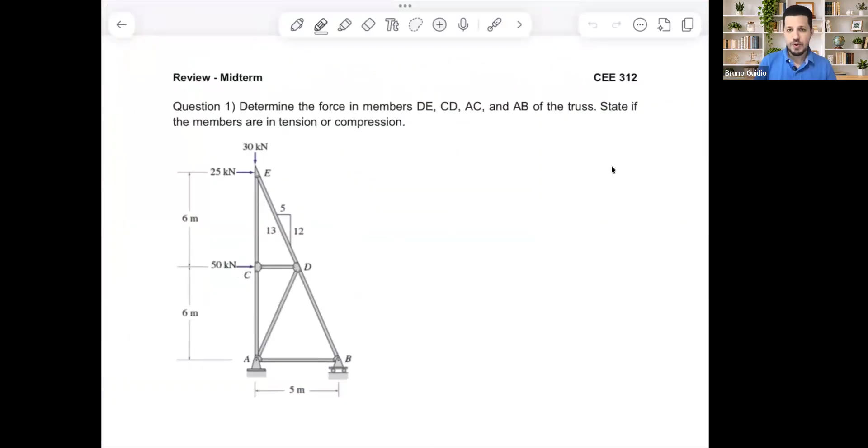Second, today is going to be the review. Let me open the review here. Okay, the review for the midterm exam, that's going to be on Wednesday.

I already told you guys about the midterm, but quickly once again, midterm Wednesday. You can take it anytime, but expect everybody to take it on Wednesday. It's going to be around 4 hours of exam. You're going to have 4 hours, but it's not that you have to use all 4 hours or that all the problems will take 4 hours to solve. Some of the problems are going to be very straightforward, but I'm going to give you 4 hours to work on it.

So today we're going to see some review here. I think I have 1, 2, 3, 4, 5 questions here in the review, but pretty much what I'm going to cover is truss, shear moment diagram, and deflection. So 3 topics. How many questions? Probably 3 questions, or 3 or 4. Let's see how it plays out, but more than 4, I'm not doing that.

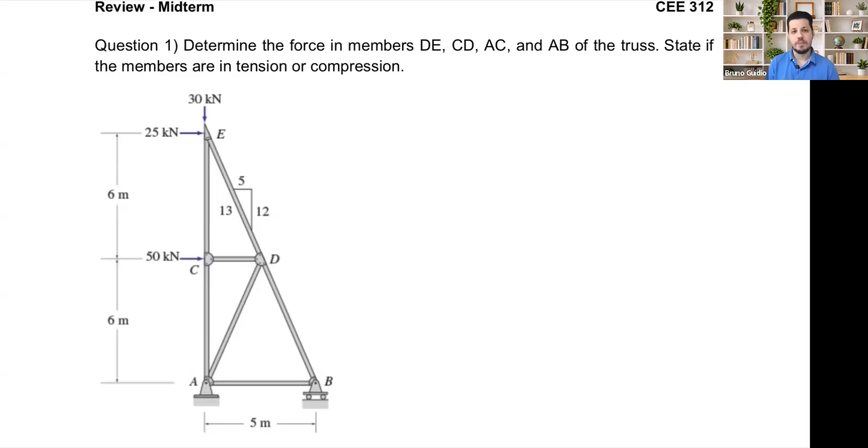For the first problem to review with you, it's the truss problem, pretty much a common truss problem that we have. For the exam, I'm going to give you the choice to choose the method you want. I'm not going to ask specifically for the method of joints or the method of sections. What I want from you is to solve the problem; which method you pick is up to you. I'll solve this problem using the method of sections, and then at the last one, I'm going to solve using the method of joints.

The last joint, the last member. So I can cover both, and also the section is a little bit tricky, or sometimes people like it but get confused about the moment. I'll cover that in the review. But again, I'm not saying you have to solve using sections only. No, you can solve by joints, by sections, or combined, depending how you like.

So the first question: we need to find the force in the members. Let me take my pen. DE, this is the member, CD, and AC, and also AB. So I need to find the force on those members - 4 members in this case - and state if they are in compression or tension. I have 30 kilonewtons on the top, 25, 50 kilonewtons over there, and this triangle here is going to help me find the angle probably. And I think that's it.

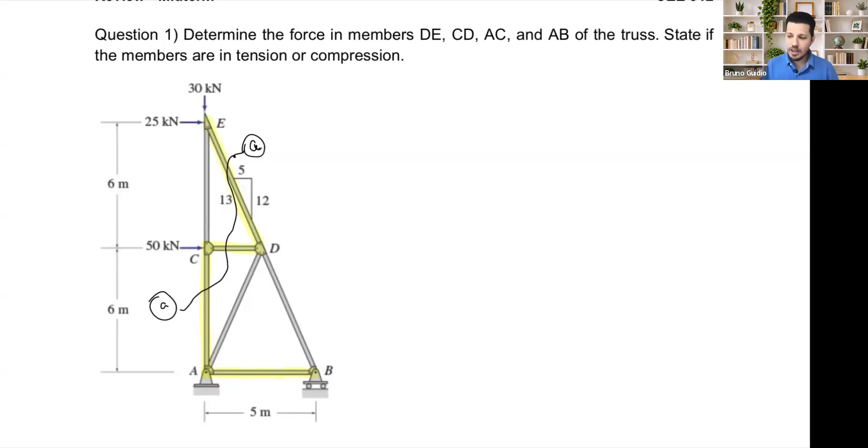All good? What's the first step that we need to do in order to start this problem? Well, the first step always is the reactions. But I don't know if I mentioned this here in this class or not, or last year.

Okay, once we make this cut, take a look, we're going to make this cut. We need to select this side or that side. For example, if I make this cut and select this side here, does the top side have any reaction, any support? No, no. I just have this part, this part here.

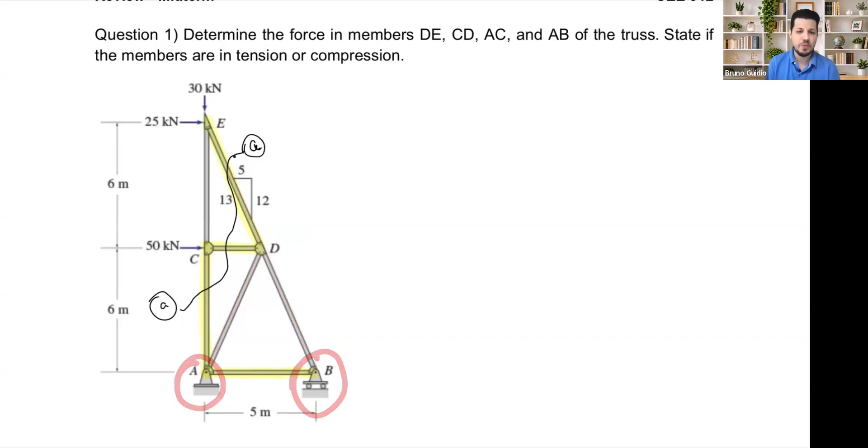Okay, this one right here. I have 50, 25, and 30, and that's it. Now, if I select the bottom part, meaning this section here, what I have is reaction A, reaction B, support A, support B. The section sometimes is good because of that.

For example, for this problem here, we can select the top and skip the calculation of reactions. We can skip it because once you select the top, we don't need the reactions. And that's what I'm going to do. I'm going to select this one here, so I'm going to have E here and up to here at C, okay.

And I made a cut, however, this cut right here, let me just extend it so I can use those points if needed. If needed, I can use those points right here. All right, I think it was too much. Should I delete this? It's narrow here. Looks better. All right.

Once I do that, this is my FDE. This is my FCD. And this is my FAC.

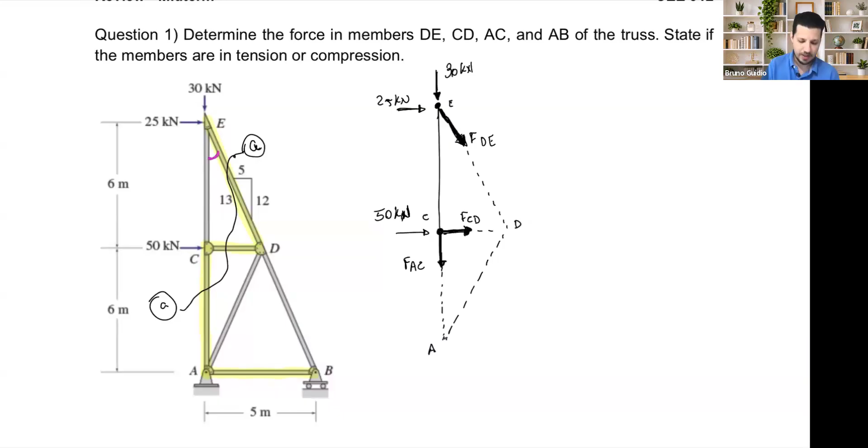All right, so that's what it is after the cut. Let's just figure it out really quickly here. This angle, let's say angle theta. What is going to be this angle theta?

Well, by similar triangles that we have here, this angle, do you agree that's the same as this angle here? As I agree, so this is the triangle, this is inverted. Okay, well, there are many ways we can think about this as another triangle here, where this is the same pink angle and this is just the opposite, so the same pink angle. And also, if you have that one, the orange here is going to be this same orange there, say alpha. Okay, and here we have many ways to solve it.

You know, the most common way that I like to solve this, it was theta equals tangent inverse of 5 divided by 12. Opposite, adjacent, or sine, cosine. These would be, here I solve it 22.62.

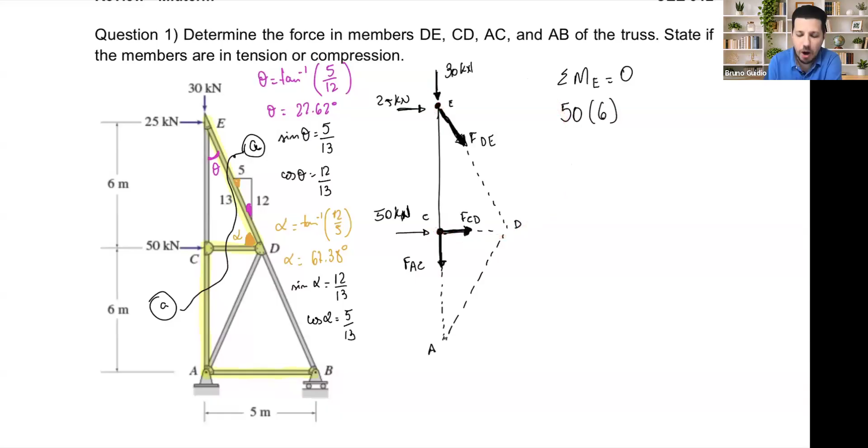So what I have is 50 kilonewtons times, what is this distance? Okay, 6 meters. And it's going to be a positive or negative moment? Is there positive moment? Positive moment. What about FCD? Well, FCD is just the same direction, just doing the same thing here.

So FCD times 6 equal to 0. What do we have, guys? FCD negative 50 kilonewtons. You guys agree with me? Okay, the 6 is going to cancel, go to the other side, negative 50. We found another one. Found the first one, actually. Okay, so having FCD now, we can still go for another moment, as we discussed before, all right?

Or we can go for sum of the force in X, because now FCD that was unknown is not an unknown anymore. Let's do that. Just to change, sum of the force in X. Sum of the force in X should be 0. What do we have in X? Positive 25, positive 50.

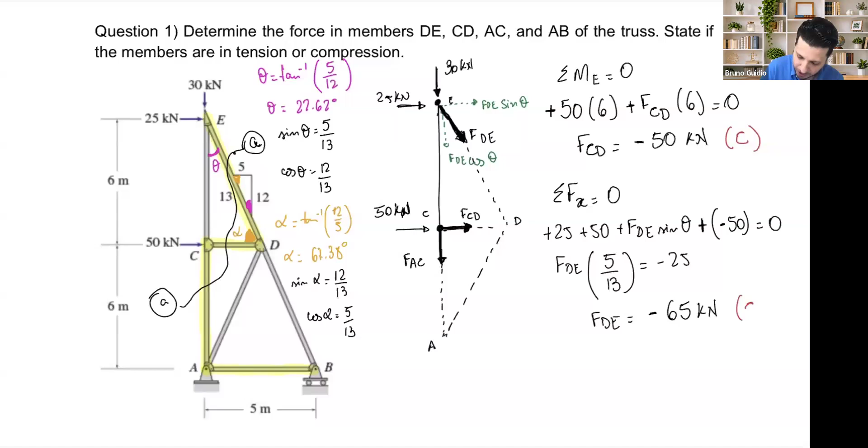Okay, I forgot, let's do this right now. Negative means compression, negative means compression. So far, so good, guys. Any other questions? Any questions at all?

No? Then let's finalize with sum of the force in Y. Sum of the force in Y should be 0. We have negative 30. Okay, negative 30. What is this? FDE, negative FDE cosine, and negative FAC. That's it? Yes, 0.

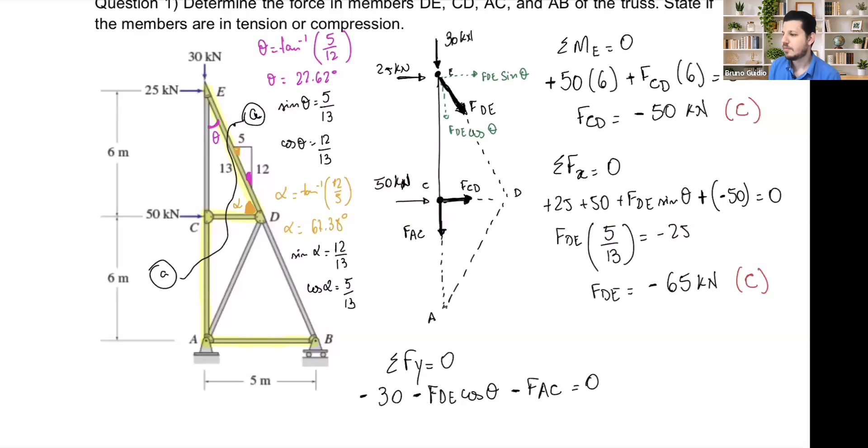What do we have? Negative 30. What is FDE? FDE is negative, so negative 65. Cosine, what is the cosine of theta? I have over there 12, 13. Or you can write cosine of 22.62 minus FAC.

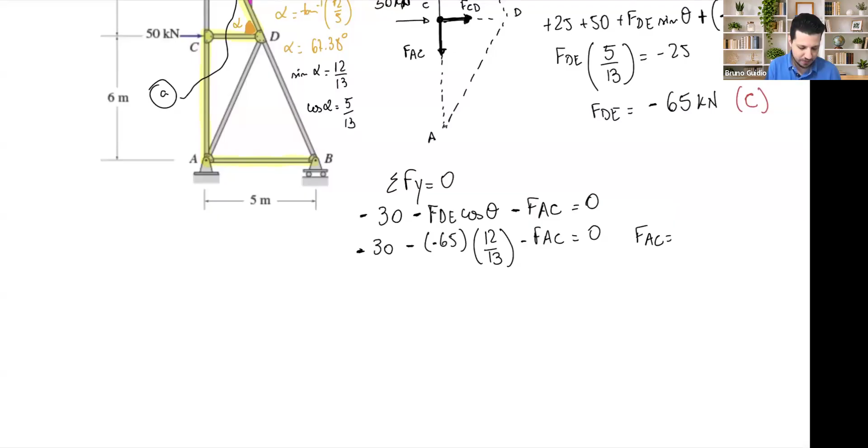Okay, so right here, FAC, go to the other side, positive. FAC, right here. FAC, go to the other side, positive. So I have 65 times 12 divided by 13 minus 30. This is 30, positive 30, 30 kilonewtons. And what I know is tension because it's positive.

Okay, then that's it. Really straightforward. I got 3 members: 1, 2, and 3. All right. Of course, I'm missing AB.

Now for AB, I can make a cut here or work with joint A or joint B. Okay, because I already know this one here. So I have 1 and 2 unknowns. And for this one, I have 1 and 2 unknowns.

However, guys, okay, I skip calculating the support reactions. And right here, we need the support reactions. And neither of those points. Okay, we need support reactions.

Okay, Cindy say, let's do A. Okay, no problem. Let's do A. But before that, we need to calculate, if we're going to do A, we need to calculate what? AY. Okay, because this is what I have in A.

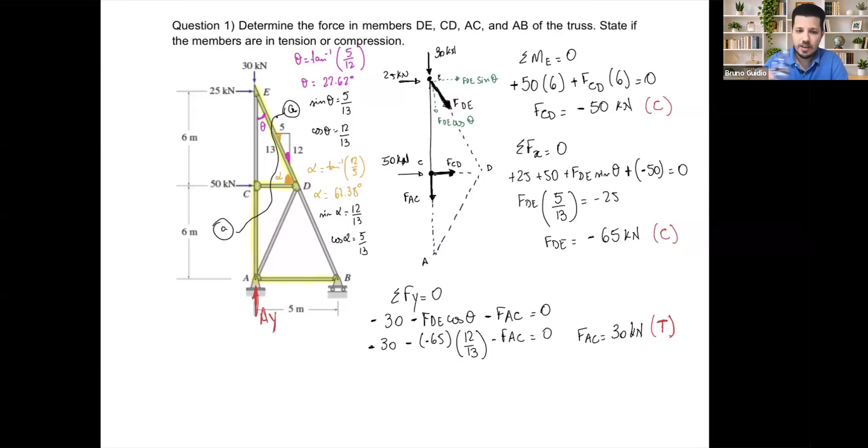And in order to do that, okay, can I do for the whole structure? Entire structure. I'll do sum of the moments about B. Bruno, why is sum of the moments about B? So I can cancel this BY and do just AY. Okay.

And sorry, I also forget. I almost forgot. Oh my goodness. That is this one here: AX, AX. Okay, because this is a pin support. It is not a roller support. Okay, so I need to find both actually, I need to find both. AX is straightforward, AX actually I can do that.

Okay, for the entire structure. So before that, let me do this AX. For the entire structure, sum of the force in X equals 0. What I have? 25, 50, AX. AX should be negative 75 kilonewtons. Okay, meaning it's going to the other side. Okay, so AX, all good.

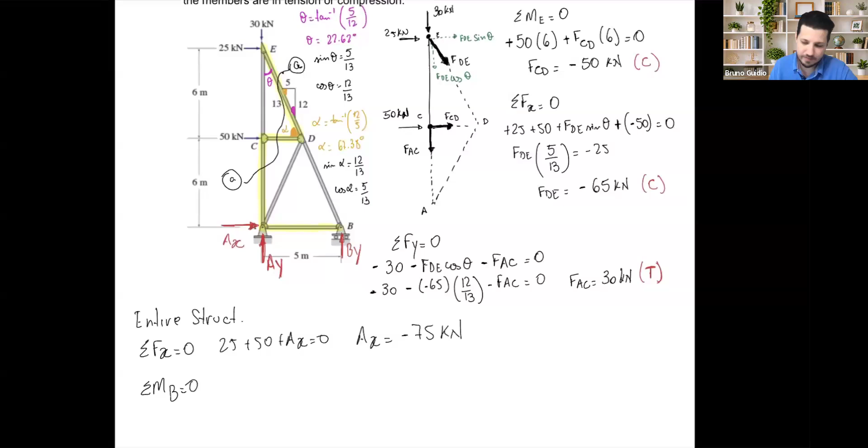So let me go back to sum of the moments about B, so I can find AY. Okay, one by one, let's go with me. Is BY doing any moment? No, so that's why I choose B to cancel BY. Is AX doing any moment? No, passing through B. Is AY doing any moment?

Yes, clockwise, so negative AY times 5. Is 50 doing any moment? Yes, clockwise. What is the distance? To B, 6. Negative 50 times 6.

Is 25? Yes, line of action all the way there, 12, clockwise. Negative 25 times 12. And the last one, 30, yes, 5. 30 times 5, counterclockwise, positive.

Okay, how much is it? Let's see. AY go to the other side positive, so negative 50 times 6 minus 25 times 12 plus 30 times 5. 450 divided by 5, negative 90 kilonewtons, negative.

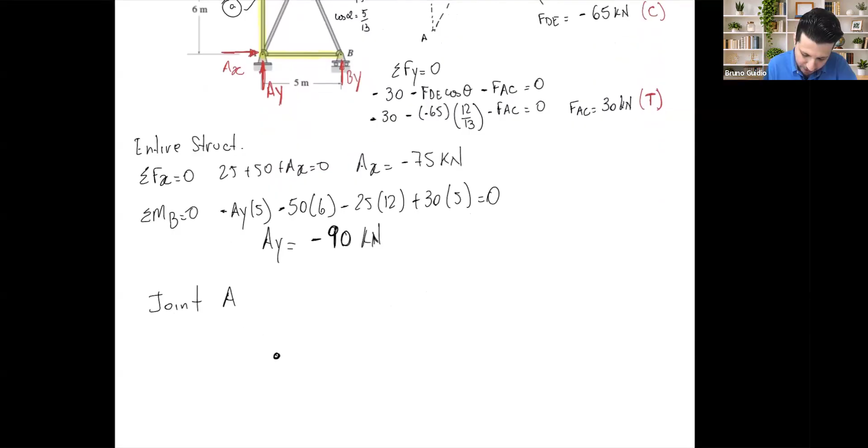My last one here. Okay. Since we said let's go joint A, so that's why I did all of those to go for joint A. And for joint A, I'm gonna have the following. See if you agree. Force AB. Force, which force is that? Force CD. AC, no sorry, AC. AD, oh my goodness, AD. And then AC is this one here, AC.

And I also have AX, AY. Now, guys, I have two ways to solve this joint that I have already many knowns. For example, FAC is 30 kilonewtons tension, meaning it's leaving this joint, which is what I put here. So this is good. FAD, I don't know, this one, let me put it right here, 30. FAD, I don't know. FAB, I also don't know. But AX and AY, I know.

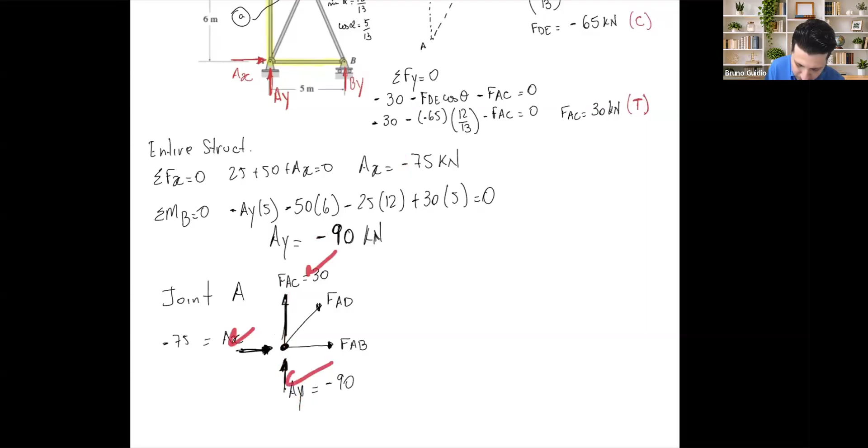Okay, so this for me is going to be negative 90, and this for me is going to be negative 75. Okay, what I'm looking for is FAB, but FAB is X. If I start with X, guys...

I don't know. However, there is a component here that I don't know as well. So it's not going to go anywhere.

So what I'm going to do, I'm going to start with Y. Let me skip one step here. Let's start with Y. Why, Bruno? Because I know. The only one that I don't know is FAD. But I don't want to know FAD. Well, sorry, but we need to know FAD in order to find FAB.

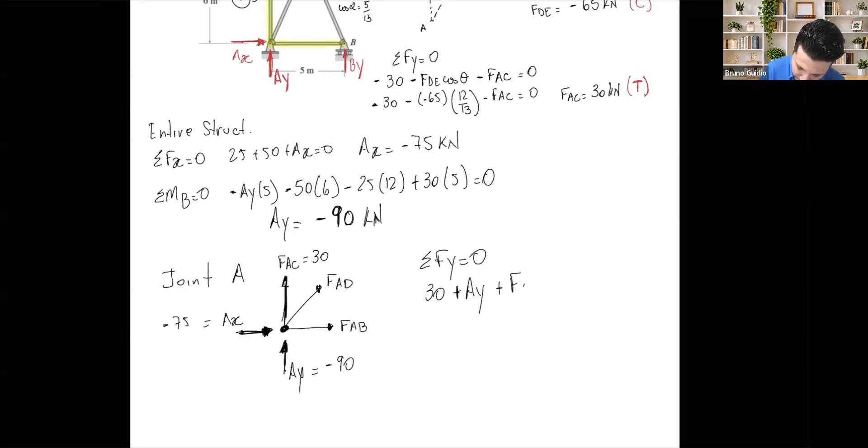Okay, so what I have going up, 30. Going up, AY, positive AY. I'm not talking about flipping this 90, okay? 90 is still negative. I'm going to put the negative here in a moment, okay? And then FAD plus FAD, oh, sine or cosine now? Of what?

Of what? What about now? What about now, guys? Okay, what should be that angle? Well, we can figure it out.

How, Bruno? You can take this triangle here, okay? Few ways. This triangle for this angle here is going to be tangent of 6 over 2.5. Tangent of 6 and 2.5.

Or you can think about what you already discovered. Guys, this one right here is our alpha. Same inclination. This one here is alpha. If this is alpha, this will be alpha as well, because we can split it here. Alpha and alpha.

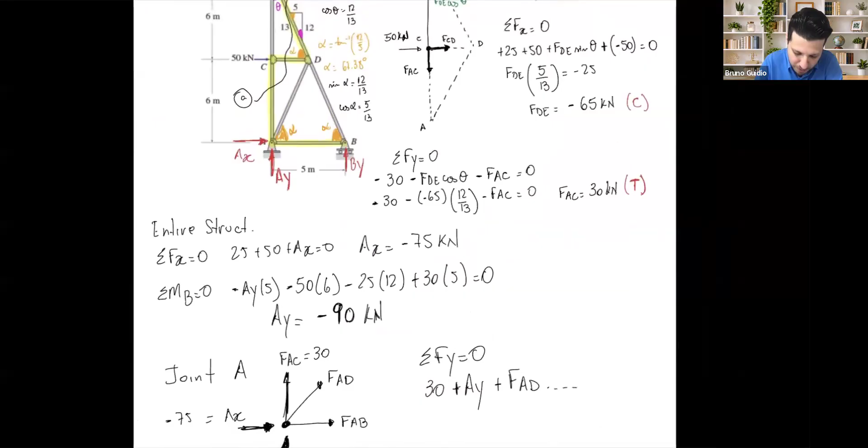Okay, so this angle is 6, 7, 38. This angle alpha. So this is going to be, okay, FAD, angle alpha here, is right here. I'm talking about the y-axis, so it's going to be sine of alpha equal to 0. So this is, okay, 30, negative 90 plus FAD.

What is sine of alpha using that one? Sine of alpha, 12, 13. 12, 13 equal to 0. How much is it, guys? Let me see really quickly here. If it is this side, so the other side, go 90 minus 30, 60 times 13 divided by 12. What I have is 65. FAD, positive 65 kilonewtons.

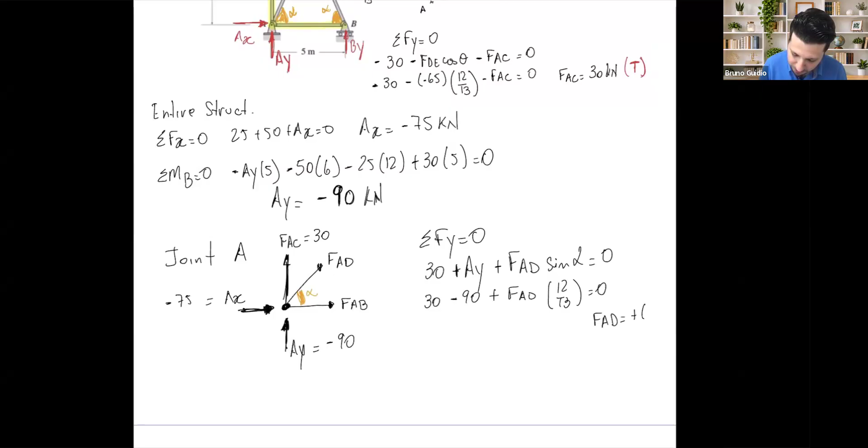Okay, and then with that, I can finish right now my problem finally. Okay, sum of forces in X going to the right, positive, plus FAB, positive, plus FAD cosine of alpha, positive. But I know AX is negative 75. FAB, I don't know, I want to find. FAD is positive 65, cosine of alpha, that is 5 over 13, if I'm not wrong, should be 0. That's it? Yes.

At the end, FAB is going to be what? 75... oh sorry, 65 times 5 divided by 13. That's 25. Go to the other side. 75 minus 25, 50. FAB is going to be 50 kilonewtons. Positive, so it's a tension. Woo! Finally, took so long.

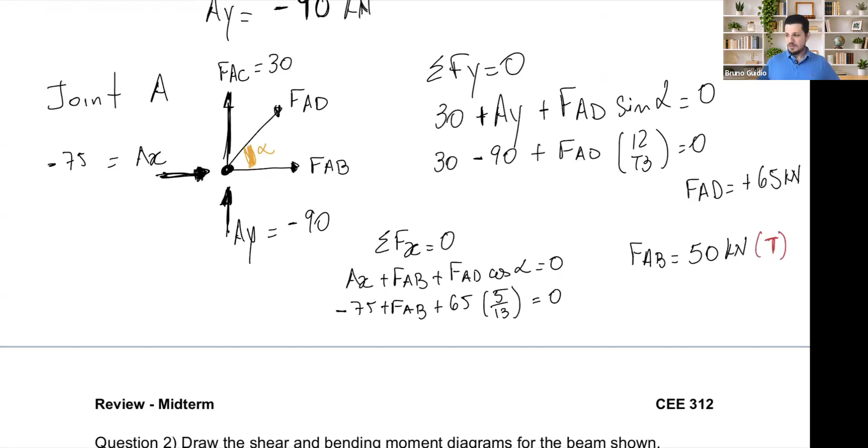Any questions? Okay. This one was a good problem. A lot of assumptions, 2 angles. That was awesome. It's great.

Section, joint, reaction, no reaction, back and forth. All good, guys? Any questions? You have the opportunity to ask questions as well at the end of the class, okay, for homework questions or whatever.

All right, so let's keep going. What time is it? Ooh, it took so long. I'll do much faster for the next one, okay? Just because that was a lot of going back and forth. And this was a long problem because I chose 4 sections, 4 members, just to show you different stuff.

Shear moment diagram for this cantilever beam, actually, is the cantilever and overhanging beam, actually, because we have this roller support and we have a hinge as well over there. How we deal with hinge. Okay, are you guys ready? Starting the problem, not wasting time anymore.

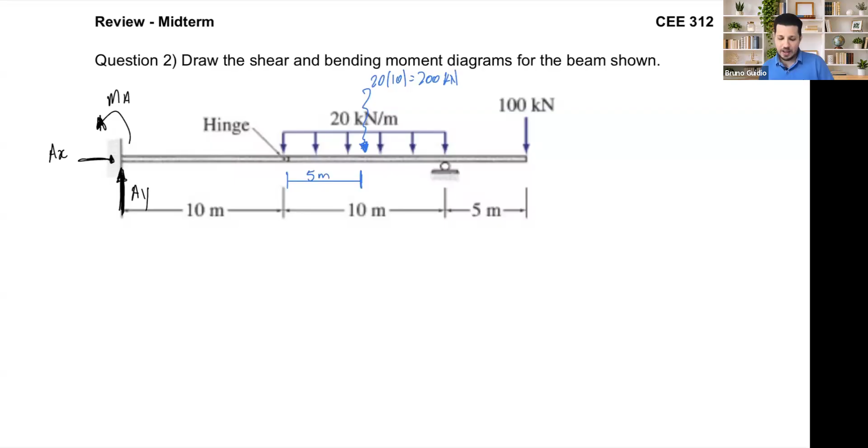So this one, AY, MA, AX, 20 times 10, right here in the middle, I have 20 times 10, 200 kilonewtons, okay, at 5 meters if needed. And that's it before I start the problem.

Okay, let me do here. Sum the force in X should be 0, straight forward, AX 0. All right, sum the force in Y should be 0. I have AY positive, negative 200. Almost forgot about this one. It's called what? BY. AY positive, negative 200, positive BY, negative 100. Okay.

I don't have anywhere to go. AY plus BY should be 300.

Now, guys, if I choose the moment about A, we have BY and also MA. So probably every single time that we have the hinge, the best is for us to start doing moment about hinge. And for the hinge, you have options: coming from the left or coming from the right. If I come from the left, I will have MA and AY, so two unknowns. It's not gonna help me. But if I come from the right, there's a known, a known, and just one unknown. It's gonna help me. So that's what I'm gonna do.

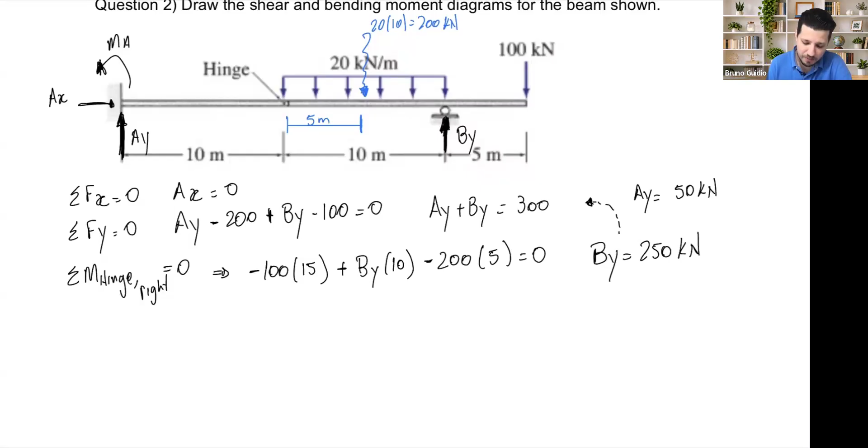If I have BY, if I have AY, what I'm missing, MA. Now I can do moment about A, I can do moment about any other point, moment about B, but I also can just straightforward here, just because to work once again, hinge coming from the left should be 0. Hinge coming from the left, I have AY negative 50 times 10, and I have positive MA. Well, very simple, MA 500 kilonewton meters.

So again, when we talk about sum of the moments about a point, excluding the hinge, we talk about the moment of every single force in the entire structure. Now, when you're talking about the hinge, the moment about that point should be 0 - the internal moment about that point. And when we are talking about internal moment, we're coming from the left to the point or from the right to the point. We don't do the entire structure for the hinge. Sounds good? Okay.

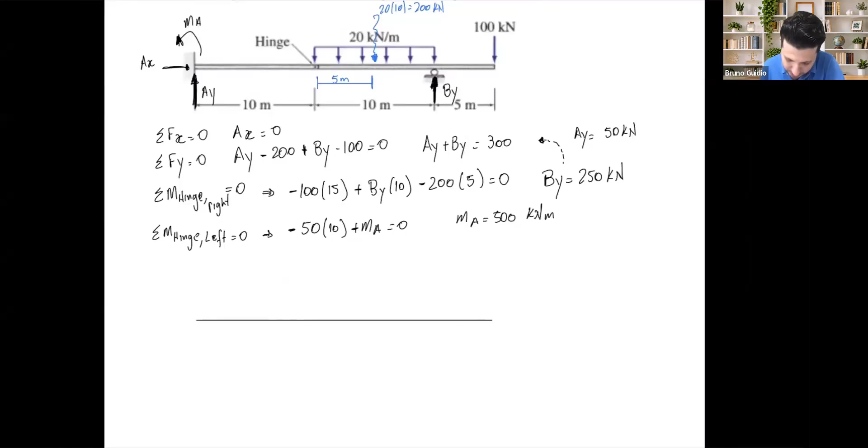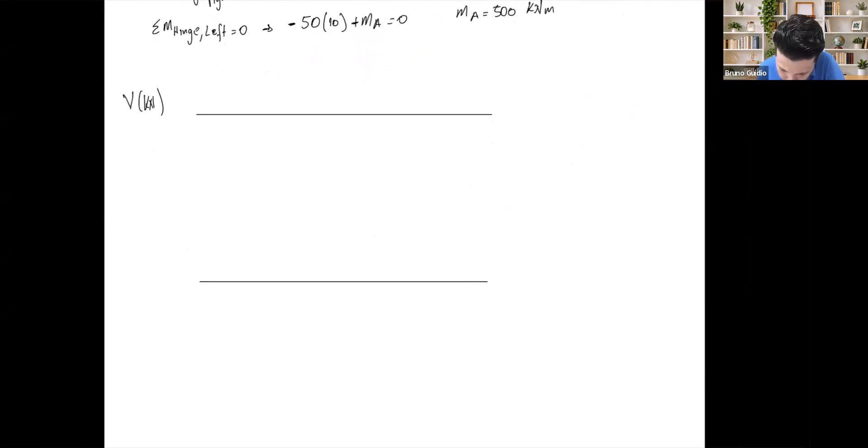Okay, now with my reactions all positive, I can do the shear moment diagram really quickly here. Let me see what I can do from here to here somehow. Is it okay? Yes. Shear, kilonewtons. And then maybe I can already draw the moment line, to their moment, kilonewton meters. Okay, so let me put it like this.

We start shear. Shear 90 degrees should have been, or to the structure, to the member. AY is doing shear, coming from the left, going from left to right. I can go just up and down. AY is going up, 50 going up. So right here, 50 going up. Then from A to hinge, I don't have anything, just a straight line.

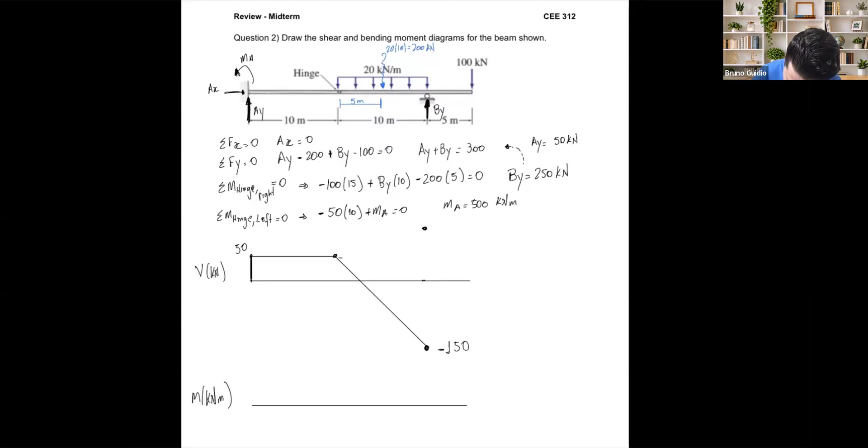50. When I start the hinge, I have this distributed force that at the end should go down to 100. So if I have 50 minus 200, it's going to be negative 150. So negative 150 should go because the distributed force should go all the way here. I'm going to guess here. And this is negative 150. When I get to negative 150, I have BY, BY 250, so I go all the way back again to 100. Maybe 100. Okay, and then I keep going to here. Then I go back to 0.

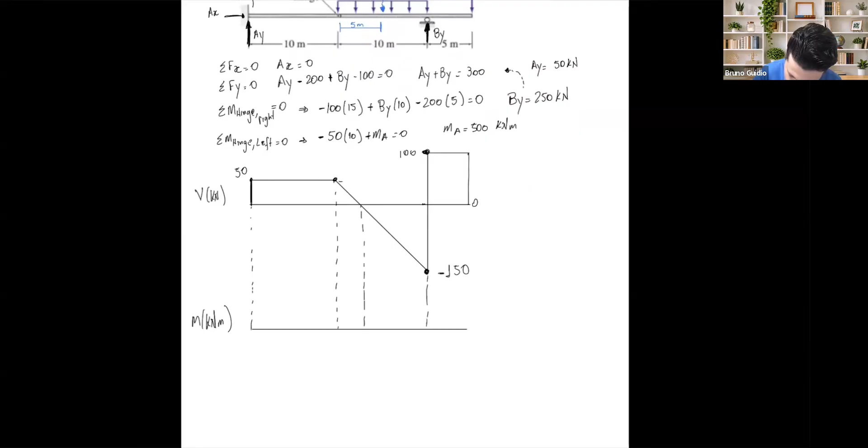Sounds good? With that, this is 1 point. This one is going to be 1 point of change. This one has to be one of those. This one here as well. And this one, of course, right there. So before I move, I need to find this x here. And that x is going to be what? The peak, 50, divided by the slope, 20. This is 2.5. This is 2.5. This one here is 7.5.

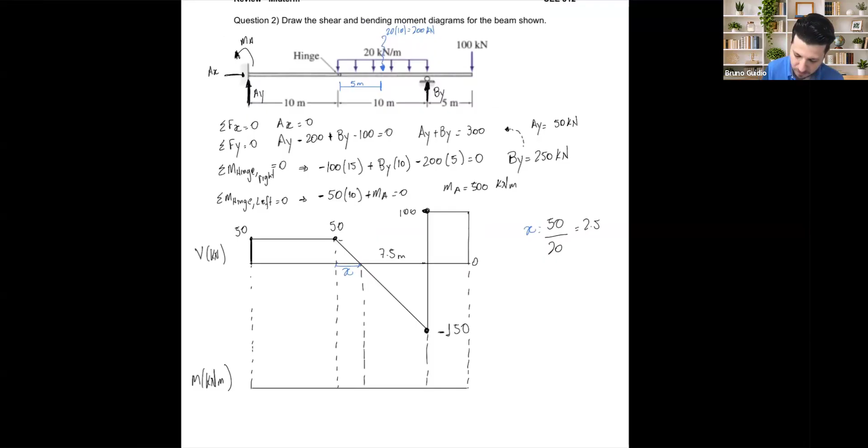Now I can just zoom here so you can see better.

Okay guys, I will skip the calculation for the area just to save some time. I'm going to use my calculator here.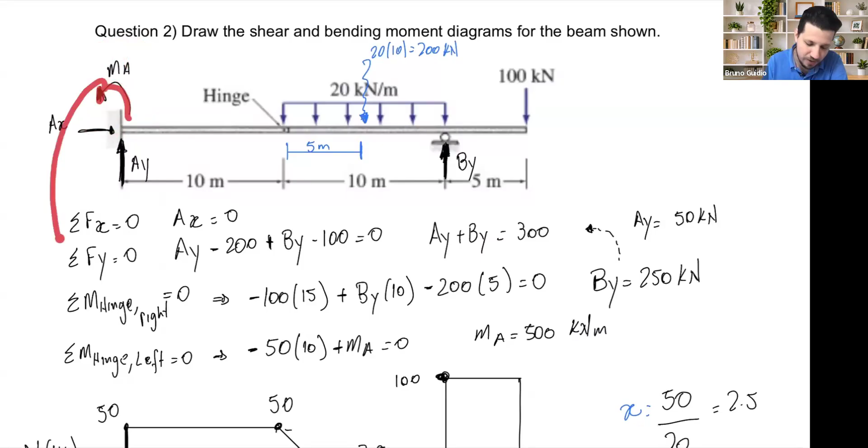So we start - sorry, let me zoom in - but we cannot forget that we have the concentrated moment here. Remember, for the moment diagram, you have to think about whether it's counterclockwise, which pushes it down, making it an internal negative moment.

So this one here, all the way to here, is negative 500. We start with negative 500, and the only time we start with some moment is when we have this concentrated moment on a cantilever beam. Pay attention, this one here is going to be 50 times 10, positive 500, which is what I was expecting because now this moment goes to 0.

Why does this moment have to go to 0? Because we have the hinge, guys. If I have the hinge, this moment right here should be 0. So if at the end you come here and you don't get 0, you're missing something. Something is wrong.

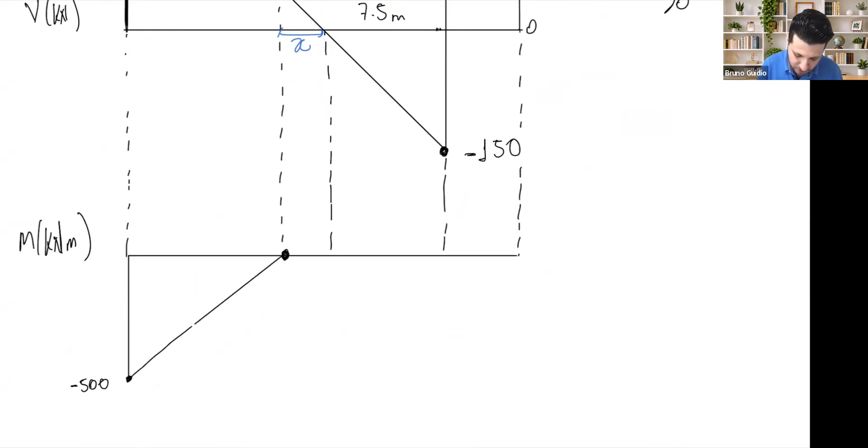So, straight line with a slope here to there, and here to here is going to be a curved line. Let's see, 50 times 2.5 divided by 2 is 62.5. So right here is going to be positive 62.5. This one is 7.5 times 150 divided by 2.

This is 562.5 minus 62.5, 500, going all the way back to 500. So right here to here, going all the way back to here, 500, negative 500. And then 500, 100 times 5 is 500, so it goes back to 0. And it's going to be straight because of that line.

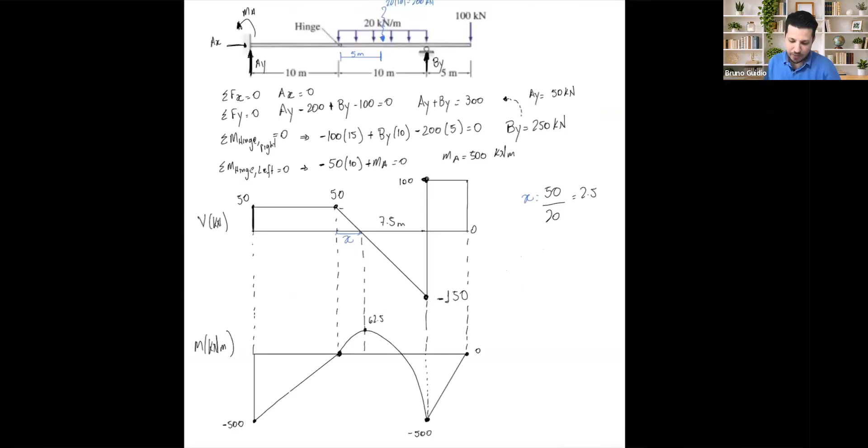This shear is 0, so the slope is 0 here. So right here I have to come like this, kind of a straight line, and leave like a straight line. So it's pretty much a parabola. And that's it - shear moment diagram for problem number 2.

Much faster, okay. Maybe what I solved in 10, 15 minutes. All right, any questions on what I just did? Shear moment diagram, all good?

Okay, so let me keep going because I don't want to leave you without solving the review. Let's talk about frames. Draw the shear moment diagram for each frame.

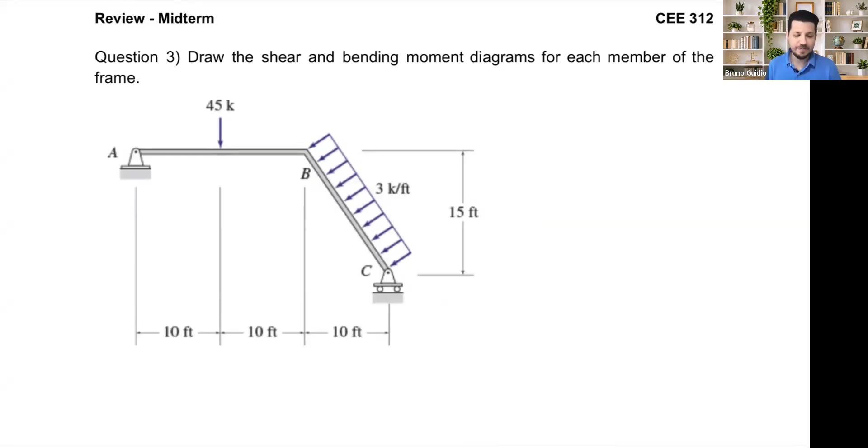Okay, I think this is a specific one - I didn't solve something like that in class. But let's see. I have the reactions: AY, AX, CY.

Let's do it correctly, right here. How much should it be? That's the question, I don't know. Why? Because it's 3 times this length.

I don't have this length. I need to find it, because this is 10, this is 15. I don't have this length, but I can find it. So the first thing here, I need to find this length. Let me put this triangle right there.

This is length L, this is 15, this is 10. Clear how we can solve it? L equals square root of 10 squared plus 15 squared. L is how much? Square root of 10 squared plus 15 squared equals 18.03 feet.

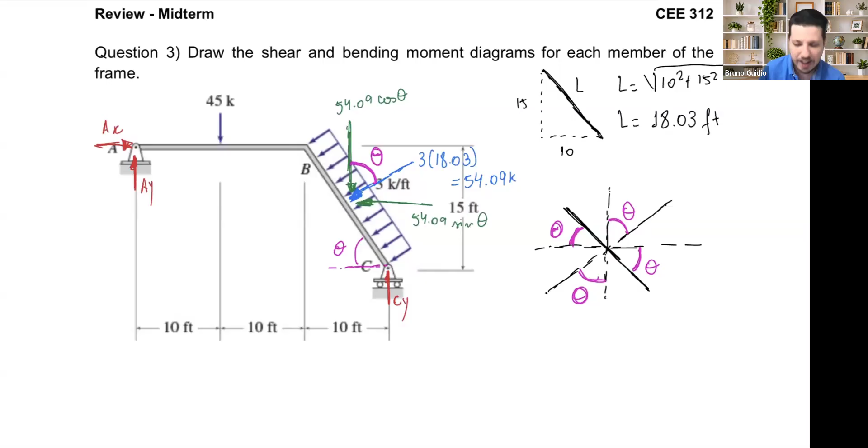Okay, that right there is theta. Now I can say that this is 54.09 cosine and this is 54.09 sine. All right, now I can start my problem.

Sum of the force in x should be 0. Ax positive, negative 54.09 sine theta should be 0. Ax should be, what is 54.09 sine of, what is this angle?

Oh, I didn't find the angle. I was forgetting the angle. Tangent inverse, what is this angle here? 15/10. What is this? Tangent of 15/10. 56.31.

Now, going back here, 54.09 sine of 56.31 is 45. 45 k's.

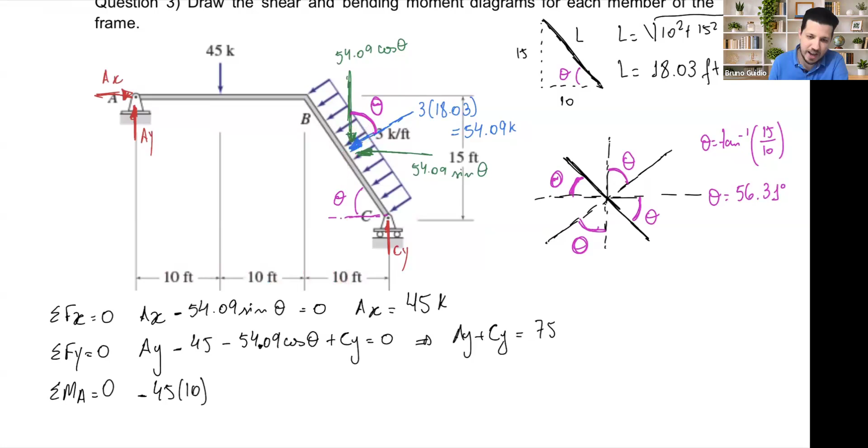What else? What is this, guys? The moment, yes, clockwise, negative. And what else? Well, this is, what is the distance? This is right in the half of it, right? So 10, 10, 5, 25. Okay, this is half of it, so it's half of this distance and half of this distance.

Okay, so this is going to be negative 54.09 cosine times 25. And then I have negative 54.09 sine times 7.5, half of 15, plus Cy times 30.

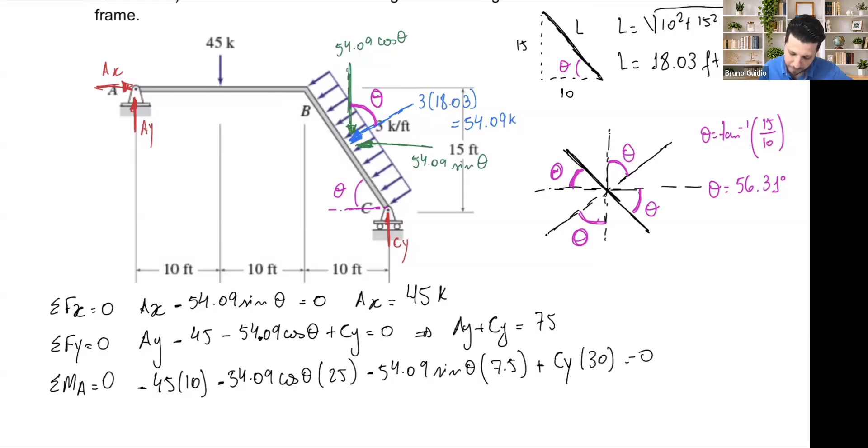Okay, by my calculation here, let me skip this one. This one I have Cy, where should I put it here? Here, Cy equal to 51.25, and Ay is 23.75.

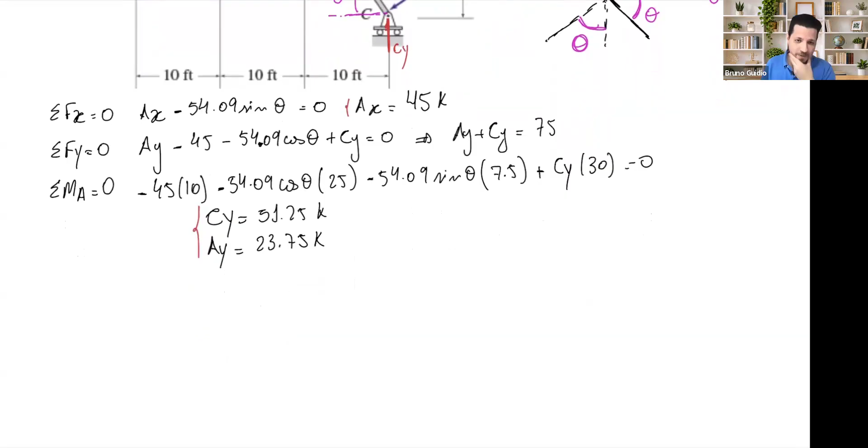Okay, then let's start the shear diagram. Shear diagram.

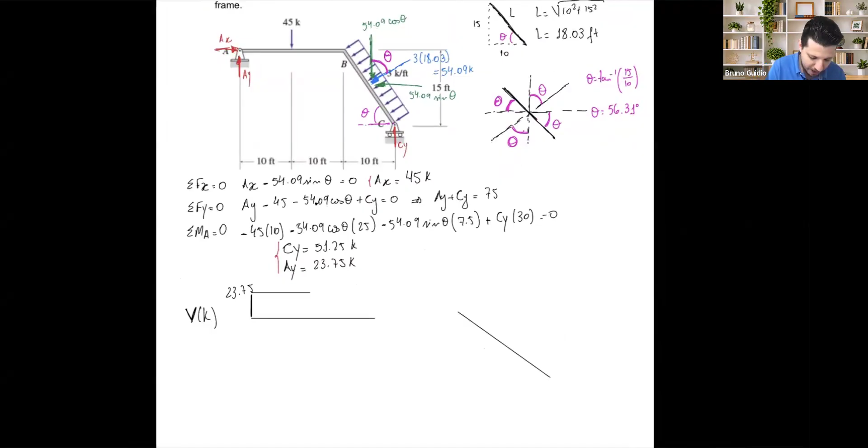Okay, shear diagram. Actually, let me do like this. That is the shear. Ay going up, Ay 23.75. Then halfway we have 23.75 minus 45, which is -21.25.

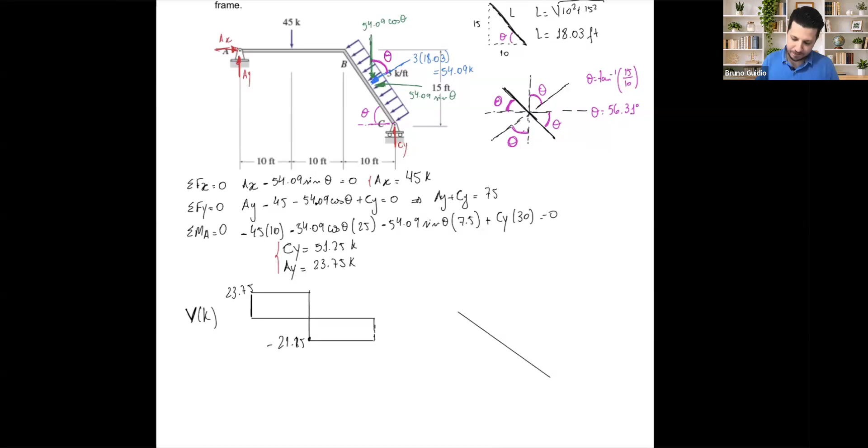Now this one here, okay, a little bit tricky. What's the shear for this point? Now it starts as the reactions for all of those. Those are action. Right here is going to be a reaction to all of those.

And also incline, take a look at this joint. That joint right here, okay, B, this is B. I have, take a look, reaction of 45, and 45 is coming here. And then I have this one here, the 45 as well. And I have this Ay, 23.75.

Okay, 23.75. What I'm going to have, and I want to know the shear with this guy here, incline. So I need to make those incline, meaning I need to find this component, okay, that component, and this other component. What's going to be those? You can also already put them together here. 45, 23.75 is going to be the 21.25 going down instead of doing both.

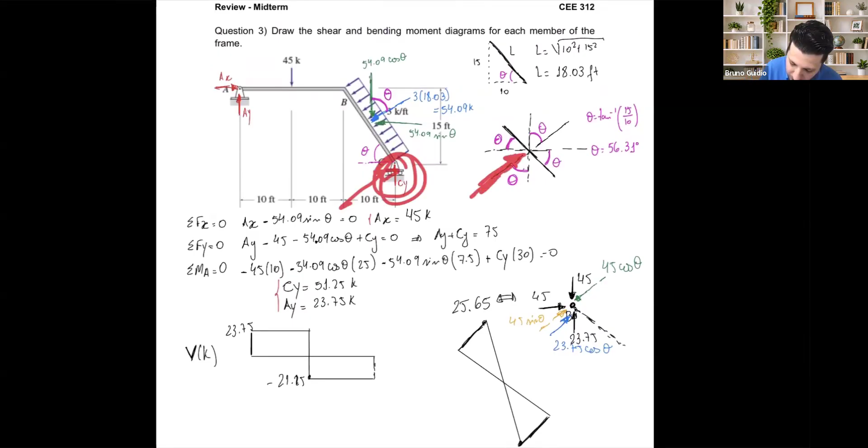So right here, negative 28.44. Okay, and luckily, I will trust myself. And if I have to do this component Cy, okay, meaning this one here is going to be the Cy, cosine 51, cosine of this angle, I have to get 28.

Ooh, okay. Those inclines always take some time. Moment. Okay, let's finalize this. Moment. Here and there. Okay, moment.

This area, 23 times, yeah, times 10. This one here is going to be 237.5. Then 237.5 minus 21... 212.5 is going to be 25. So this one here, 25.

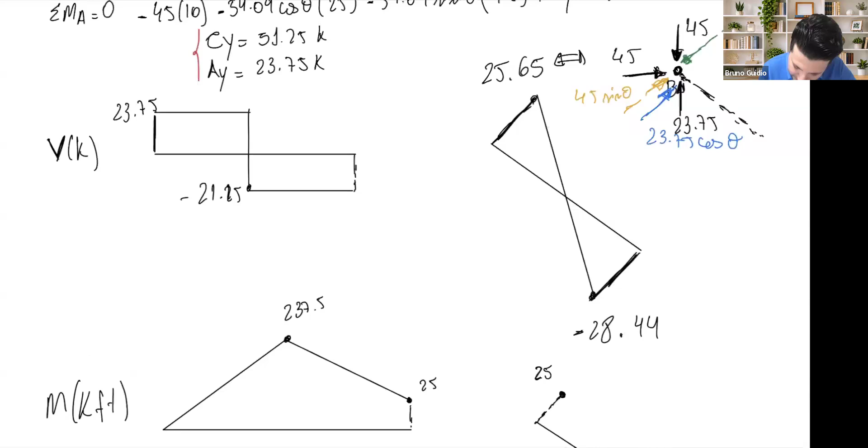Doesn't care if it's inclined for the moment. If we have 25, it's going to be 25 here. Then I'm going to calculate those areas, and then I need to calculate that X here. What is this X? X is 25.65 divided by the slope. What is the slope? 3, that's the slope already inclined. So X is, my calculation, 8.55.

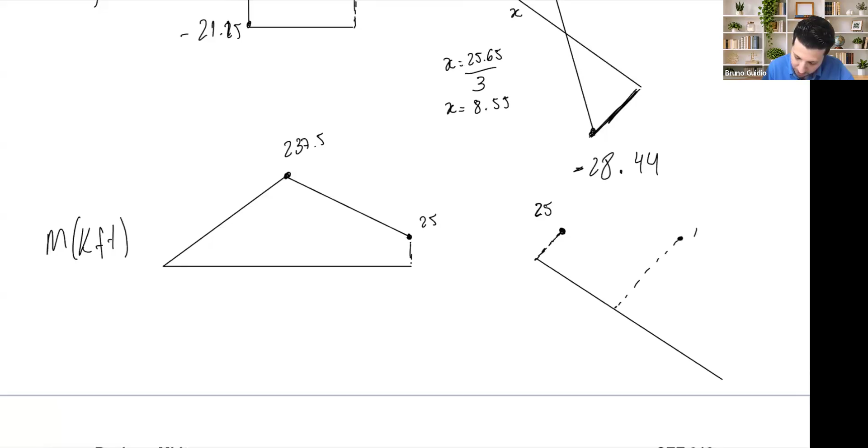Okay, calculate that area. You're going to go up to 134.76, then close at 0. Slope 0, and then go all the way like this. Very straightforward here at the end, just calculate those areas. So I'm skipping calculating the areas here, just giving the solution. That's the easy part, calculate the areas.

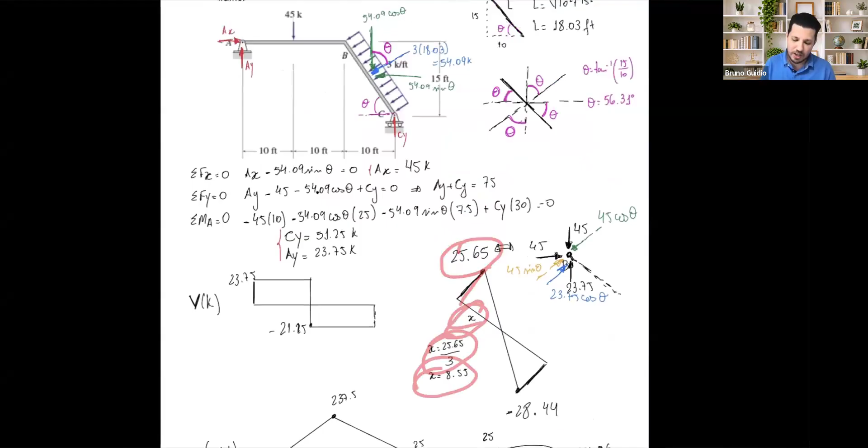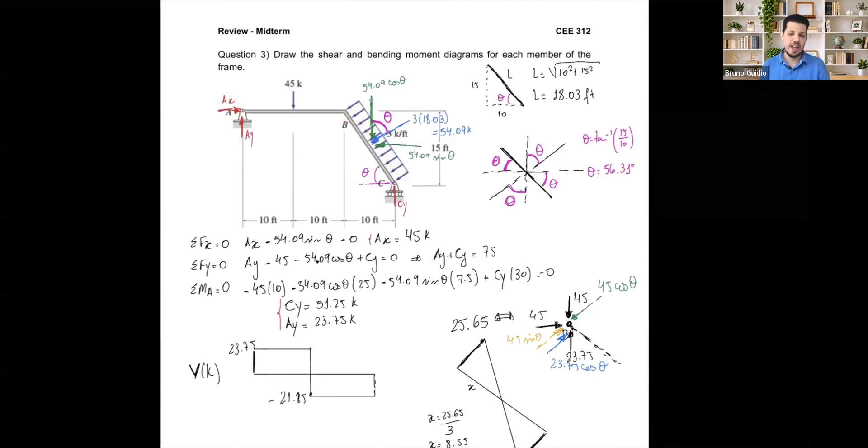Before I move to the deflections, something about those problems: know how to calculate this X. What I'm doing is take the peak and look here for the slope, because we did this here as well. What else? Know how to do this, especially if you have a frame for shear moment diagram, or for the deflection in a moment. Remember, moment that finish is the moment that start, but this does not happen with the shear. Shear you have to find the component, and see if other force like this AX is doing shear on this member, but it's not completely the AX, it's the component of AX. So that's it for shear moment diagram.

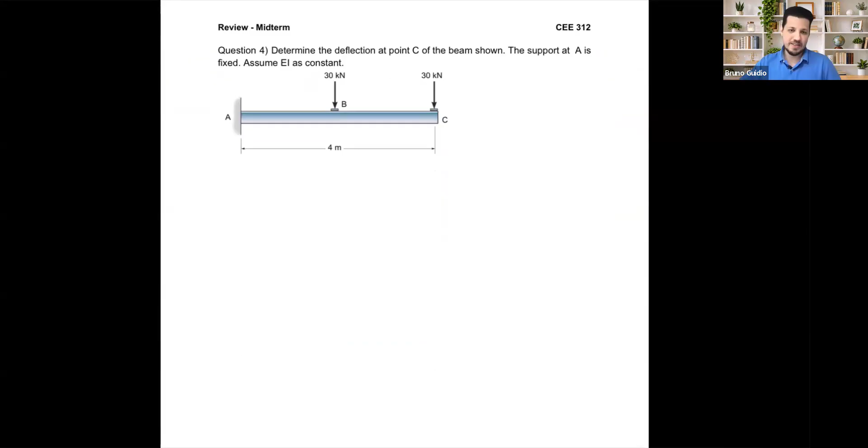Ooh, this is going to be straightforward. I have two deflection problems that are straightforward, not complicated, so I can discuss just one thing that I want to show for you on the table. Assume EI is constant. For this one, let's jump to it quickly.

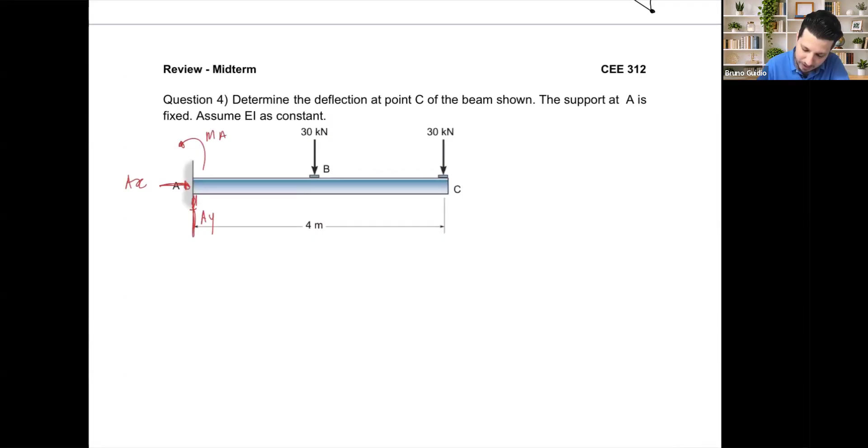AY, AX, MA. Sum of the force in X, AX is 0. Sum of the force in Y, AY is 60. Sum of the moments about A: 30 times 2, 30 times 4, so 60 and 120. MA is going to be 180 kilonewton meters.

I'm going straight for it, I'm not going to keep writing things here, but please show your steps, every single time. Shear: AY is 60, half of it 30, then the other half 0. Moment, counterclockwise, but the internal moment is going to be negative.

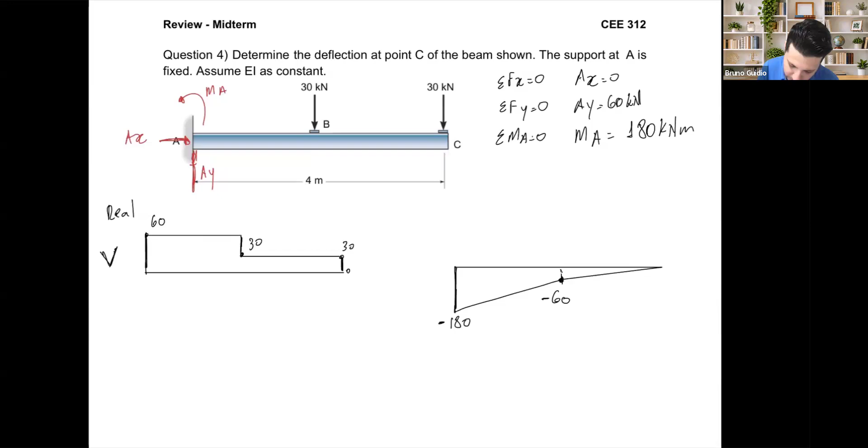Write down that's the real moment, write down that's the real, and then you're going to go for the virtual case. It's asking for deflection at point C. Point C is right here. Deflection at point C, keep the same structure. Remove all the loads, add the load in the direction of the deflection that you want. I will assume this is going down.

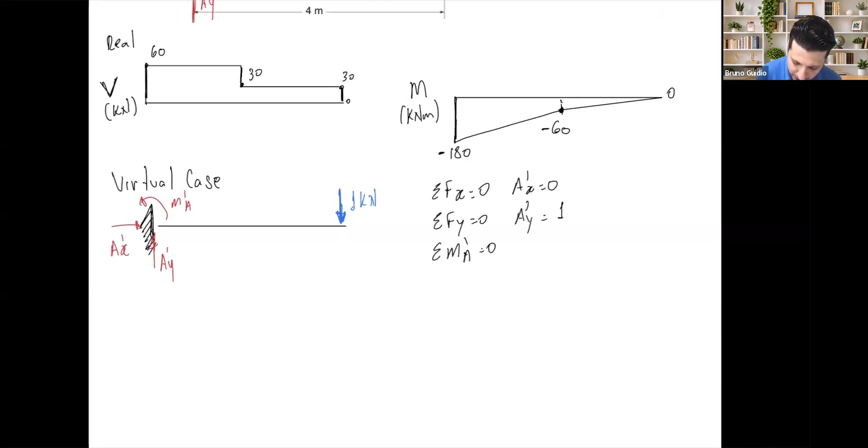So what I have: AY prime, AX prime, MA prime. Sum the force in X, AX prime is 0. Sum the force in Y, AY prime is 1. Sum the moments about A, 1 times 4, MA prime is 4. With that in mind: shear virtual, moment virtual, shear goes up 1, all the way 1, positive 4, starts here negative 4. 1 times 4, that's the area of the shear, right here, 0.

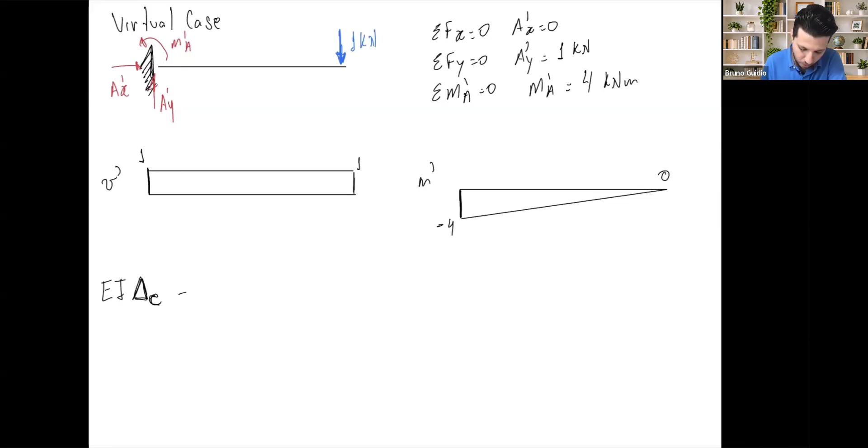Okay guys, now it's just table. EI, deflection C. What I have? Take a look at the moments. Here I have discontinuity, so pretty much I have this shape here, trapezoid, and this triangle. So what I need to do is find another shape here. I need to split these because they need to be the same, 2 meters and 2 meters, 2 meters, 2 meters. Now this is a straight triangle; if I cut this in half, it's going to be -2. So now I'm going to compare this trapezoid green with another trapezoid and a triangle with another triangle.

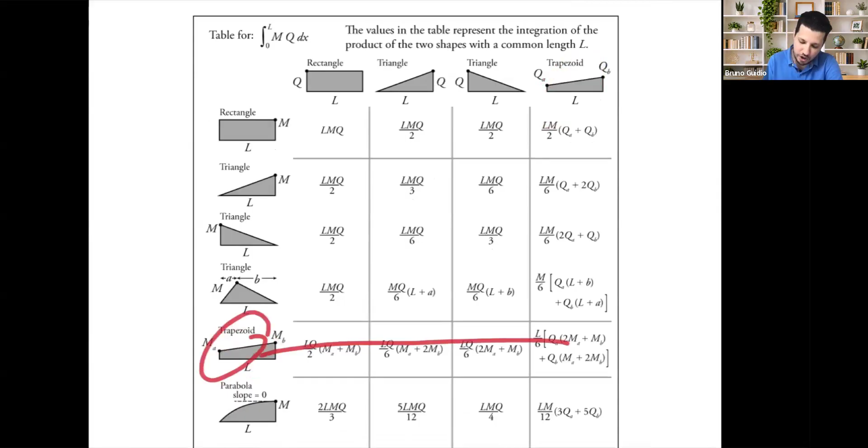Let's find the equations. Trapezoid, trapezoid, right here, guys. So remember, for the trapezoid, it doesn't matter if they are flipped or not, there is no problem. The problem is when we start working with triangles or shapes that are almost a triangle, like a parabola.

Trapezoid doesn't matter. So right here is this equation here. That's what I want to emphasize to you: if you get a trapezoid, the equation is big, so pay attention to what you're doing, all right?

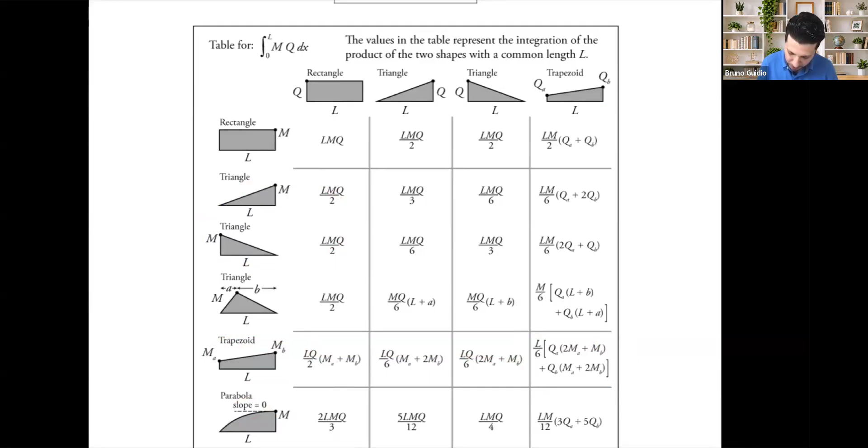Can I copy only this part here? Let me see if I can copy this. Copy it. Let me see if I can paste. Oh yeah, nice, okay.

Right here, okay, so this is going to be the following. Q is my M prime, so this is going to be what? L is 2, so 2 over 6.

Q, -4, parentheses, 2, MA, -180, plus -60, plus QB. QB is -2, M2, so input plus 2, and then parentheses MA. MA is 180 plus 2 times 60.

Did I close all the parentheses? Yes, so take a look. This is a mess, okay, so please take your time solving this in the calculator one by one. What do we have to multiply here?

We solve this one inside first, then multiply by my -2. That was my bad here actually, so this one here I'm missing a parenthesis. This is 2 times... no, it's not. So just 2 times this plus that, okay?

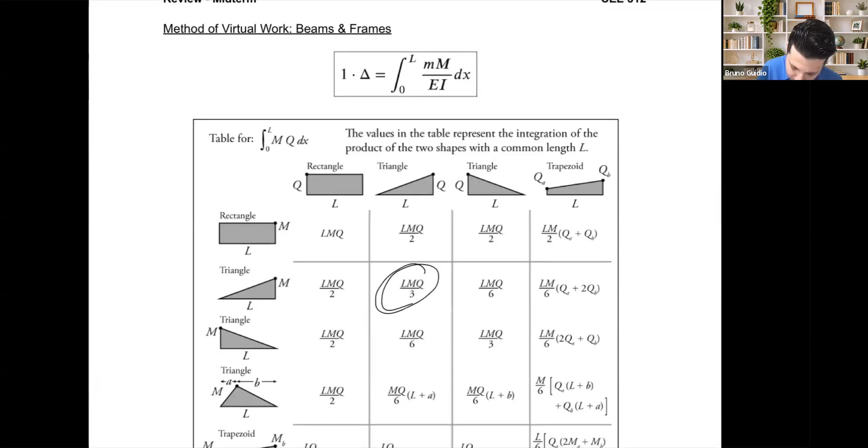L, M, Q, 3. At the end, okay, that should be the answer. So pay attention on those trapezoids, do it part by part. Okay, so not a difficult problem, just much more straightforward than the others, at least the shear moment diagram.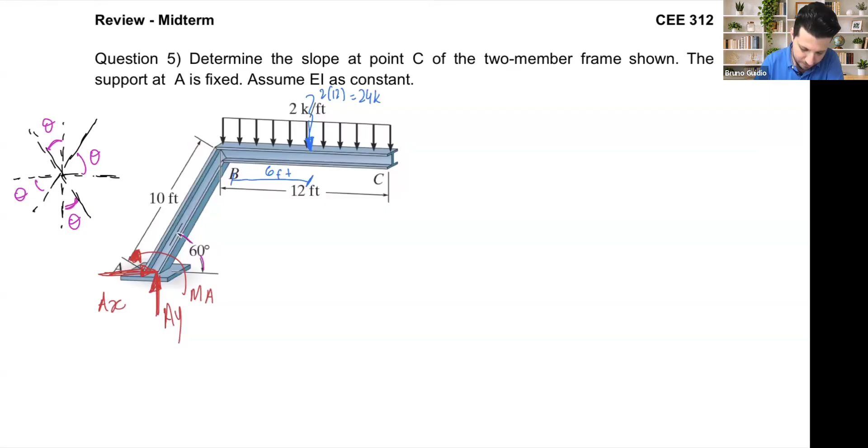Just in case I will need: sum of the force in X, 0, AX equals 0. Sum of the force in Y: AY plus 24, sorry, negative 24. AY is positive 24. Kips. Sum the moments about A.

Why, Bruno? I see 6 here. Yeah, but 24 to point A, this is not 6. 6 is just a part of it, okay, up to here is 6. We are missing something, we are missing this part here. Okay, there's a catch, always a catch. Can we find how much is that? Can we find how much is this part here? Let's call this X.

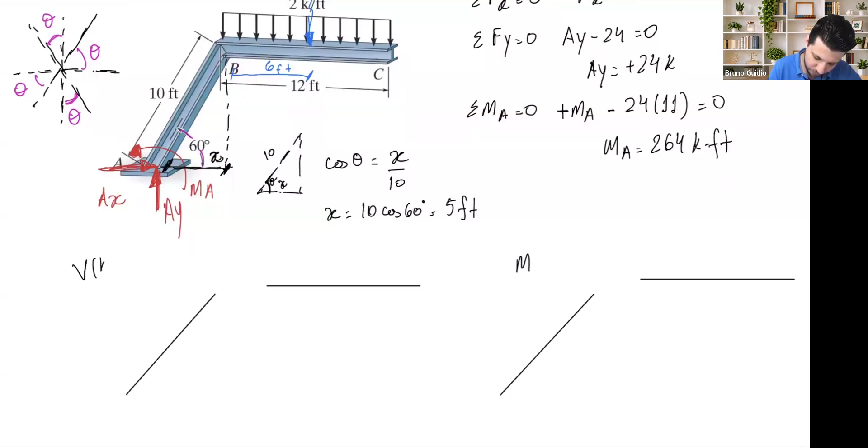Okay, shear. Now I start those kind of things, working with components. Why? Because shear, AY is doing shear, yes, but not all AY, its component is. AX is doing shear, yes, but not totally AX, it's just its component that's doing shear.

Okay. Is moment doing shear? No. So moment, no shear. So we need to find the components of those two.

Of course, AX here is 0, so we can cancel, we can forget about this AX. AX is 0, so let's worry just about AY. But sometimes AX is not going to be 0, and then you have to consider it, that's why I'm telling you.

Okay, but AY here is not 0. So AY, if you bring it to here, its component that's going to cause shear is this one, which is going to be AY cosine of 60.

Okay, so right here, its component is AY cosine of 60. Cosine of 60, we know that's half. AY is 24, 24 times half, 12.

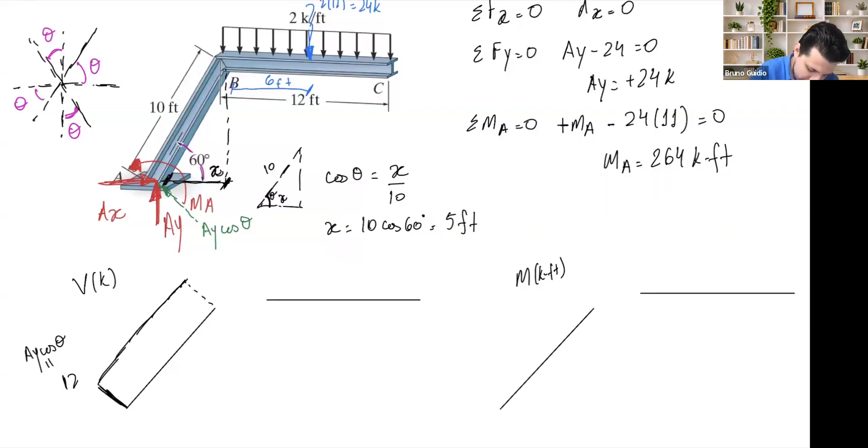And then right here, we bring all those force up to this point, because this is going to cause shear on this beam. It's going to be AY, so it's going to be 24 up. Then we have 24 going down. Very good.

M, counterclockwise, but the internal moment is going to push down. Sad face, so this is going to be negative 264.

And then this area here, 12 times 10. Why 10? Because this is the length. 120 positive, and 264 is going to be, sorry, right here, negative 144.

Negative 144. Remember, moment, rigid joint. This one here is also 144. So this one there, 144. Then 24 times 6 is 144.

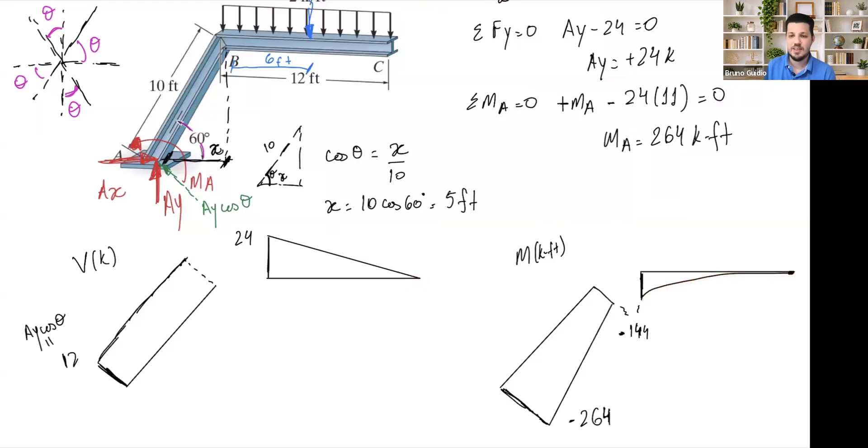Then going back to 0, this incline goes as a curve, like this. Why is it like that? Because right here I have 0, so I have to come to this point like a straight line, with slope as 0.

Where's my space? Okay. Virtual case. Give me more minutes, few more minutes. I'll finish this one, guys. Almost there.

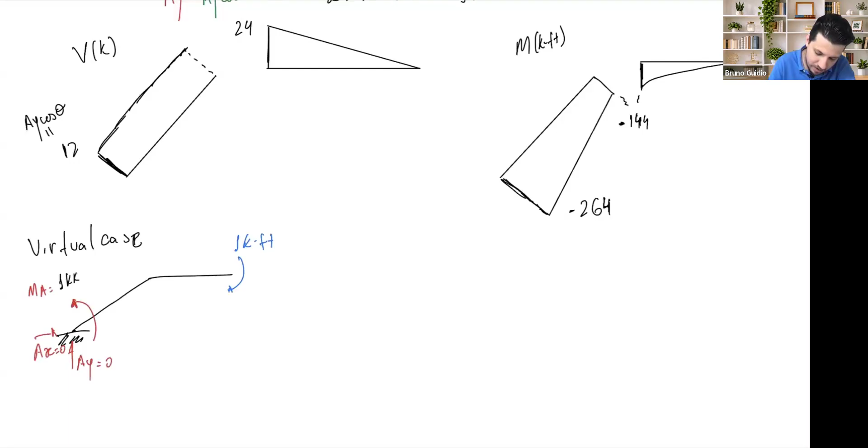One kip-foot, not one kip, sorry. AY 0, AX 0, MA 1, to counter that one that I'm putting in the system. Can I do it here really quickly?

Shear. I don't have shear. AX and Y are 0, so 0, 0. Moment.

This one I start -1. Go all the way there, -1. Start as -1, all the way there, back to 0. Okay, very simple, the virtual one.

Very simple. So what I'm going to compare, use the colors again, green rectangle and green trapezoid. And this is a parabola and rectangle.

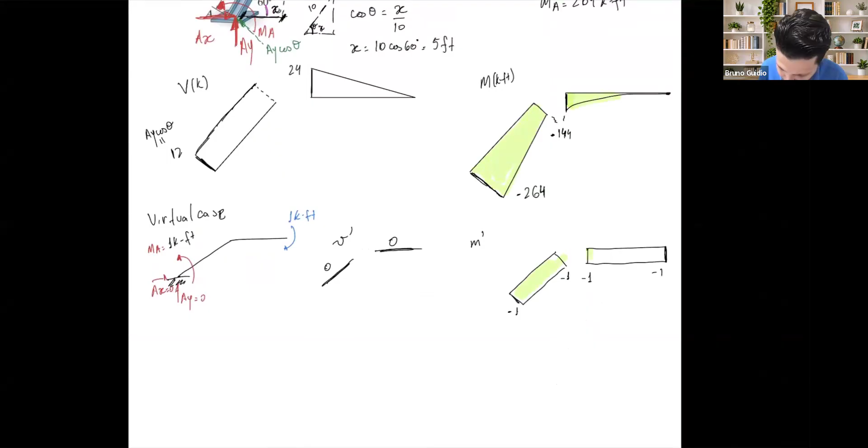EI, rotation, trapezoid, 264, 10, 144, rectangle -1, plus this parabola -144 of 12, then -1, -1.

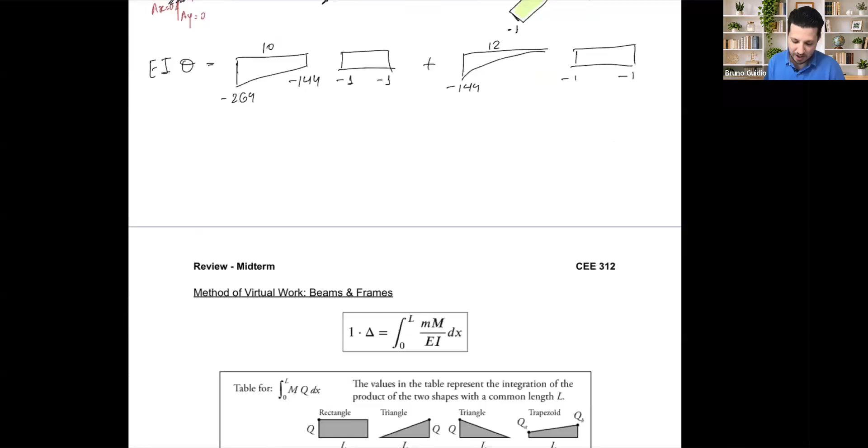Let's go to the tables and find trapezoid and rectangle. Trapezoid and rectangle right here. LQ divided by 2, MAMB. So this one here is going to be L, 10.

Q, -1. -264. Plus -144. Divided by 2.

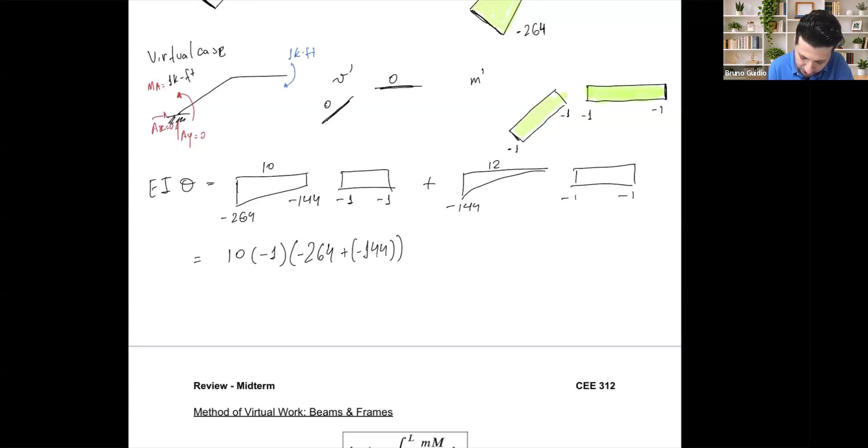Plus parabola in rectangle, so it doesn't matter the side. With rectangle is LmM divided by 3. L, 144 minus 1, 3. And then, guys, the answer should be this one here.

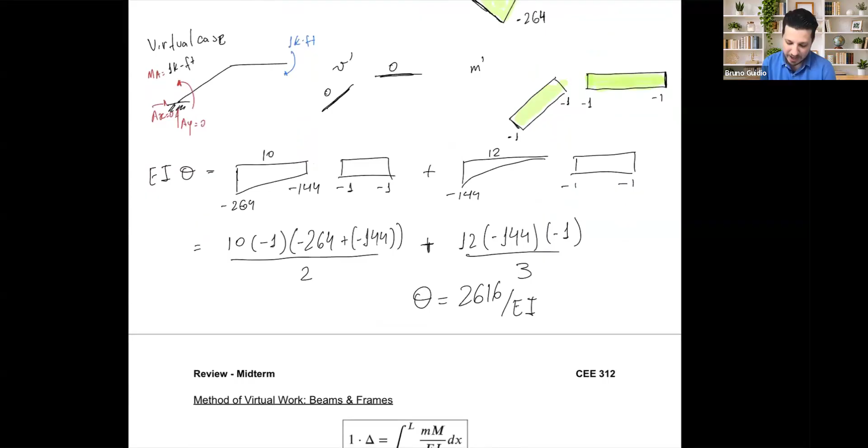Woo. And that's it. Okay, so those are the kind of problems that we can find in the midterm.

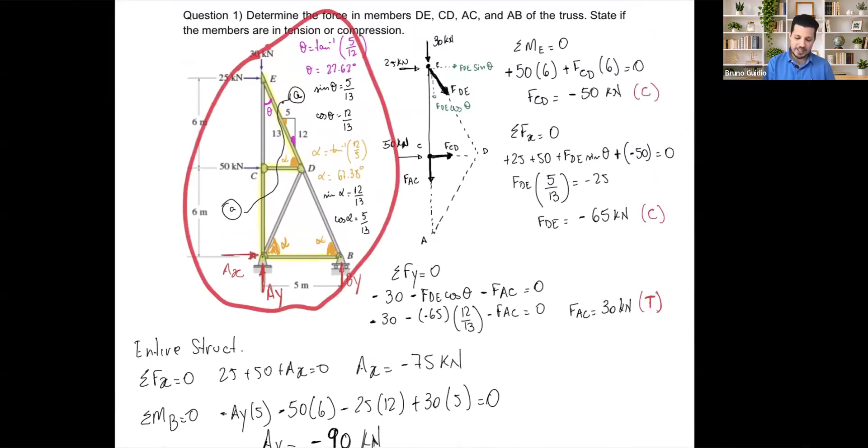Deflection, let's go again. Deflections, frames, and deflection beams. Diagrams for frames, diagrams for beams, especially with hinges. And a review of truss, and you can pick joint or section. Okay, so study the one that you like the most. Sounds good.